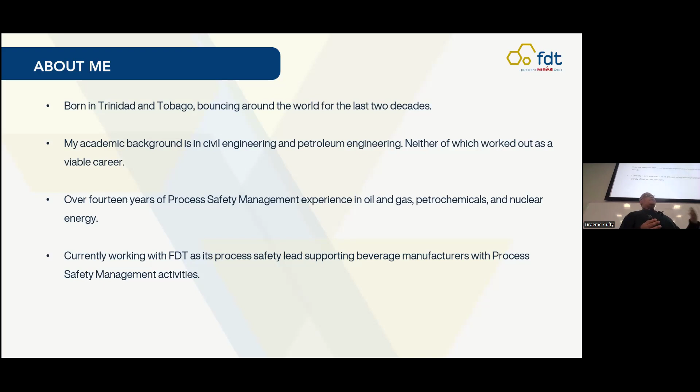This is going to be a silky smooth kind of presentation. So we're going to look at the origins of inherently safer design, where it fits in risk management, what the principles are. We're going to look at some real world experiences where maybe inherently safer design could have made a difference in the design of process systems. And we're going to look at some methods for actually incorporating inherently safer design into a project.

I realize it's a lot of young people here, but if you've worked in the industry for a while, have you heard of inherently safer design? Just raise your hand. Okay. Have you applied inherently safer design to a design project? Okay. And put up your hands if you've applied it consistently through all phases of a project and documented it in detail to allow an auditable trail. Okay, there you go. That looks about right, yeah.

Okay, so just to start off, an event that didn't go so well and maybe inherently safer design could have made a difference. So October 31st, 2014, a reusable suborbital rocket for a space tourism company owned by a billionaire, which you may know about, was undergoing a flight test. So the design of this vehicle used two twin booms, which they call feather flap assemblies, and those stayed at a 0-degree angle in normal flight. During re-entry, the feather flap assemblies would be rotated to 60 degrees to stabilize the vehicle and to slow it down as it re-entered the atmosphere.

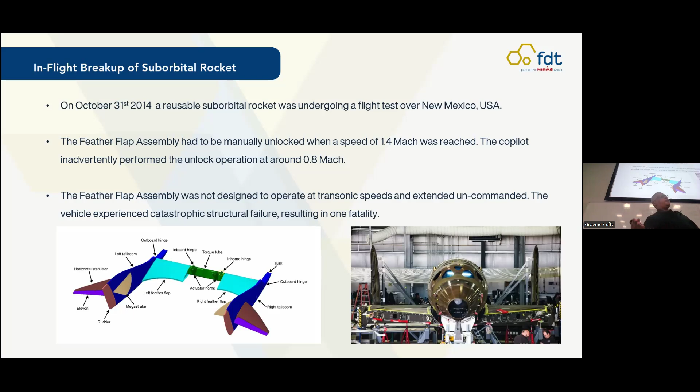So unlocking the feather flap assembly is a fairly straightforward process. It's basically just pulling a lever from lock to unlock, but it's an extremely difficult environment to do it in. So for one thing, there's time pressure. The co-pilot has 3 seconds to unlock the feather flap assembly. After 3 seconds, the computer will start screaming at you. And at 1.6 Mach, the flight would have to be aborted if they have not been unlocked. And at that point, you have a bunch of people who have paid $500,000 mad at you because they have not made it into space.

It's a very difficult operational environment. You had vibration and G loads. So the video from the cockpit recording showed the co-pilot had to lean off of his chair in order to reach the lock. His head was bouncing around. He was having a lot of problems getting a good hold on the lock. Also, the co-pilot was not used to the conditions. So he had qualified fully on a simulator, but this was his first actual flight in the spacecraft.

The unlocking steps are listed on a kneeboard, but pilots had said that there's so much workload in that environment that there's no time to actually look at those steps, and you're doing it all from memory. And the company assumed that pilots would get it right all the time because they had been trained. I'm not a rocket surgeon, so I'm not going to speculate on what the correct answer is. But based on the difficult working conditions and the fact that you could kill somebody if you get it wrong, that was an ideal time to think about how could we possibly do this differently. And maybe inherently safer design could have made a difference there.

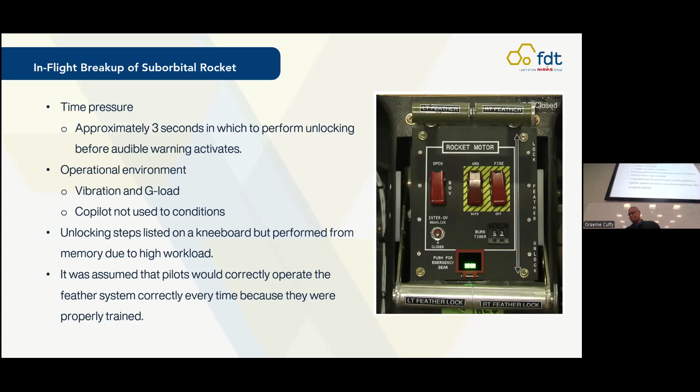Okay, ISD's origin. So there was a guy named Trevor Kletz, and he is the OG of ISD. So in the 70s, there were a whole bunch of fairly bad industrial disasters. And in 1978, Trevor Kletz thought that something had to change, and he actually formalized the idea of inherently safer design.

His thing was that if you don't have something, it can't leak. And that has the added benefit of making your plant simpler, cheaper to operate, easier to maintain.

The thing is, since humans started actually doing stuff, we've been applying principles of inherently safer design, even if you don't know it. We're all here because our ancestors applied inherently safer design on some level in order to survive. So, for instance, say you're in the desert southwest of the United States 800 years ago, and you're part of the Anasazi tribe, also known as ancestral Puebloans.

You got other tribes that are raiding you all the time, taking your stuff, killing your people, and you got a number of options for handling that. You got to do something about it. So maybe you can raise an army, but then you have to train these people, you have to develop weapons, all of that takes resources.

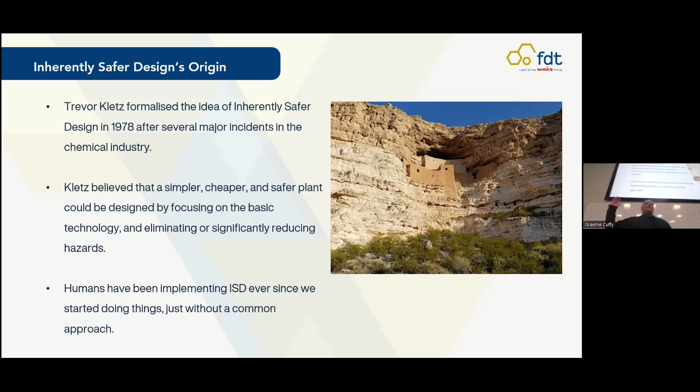So why do that when you can just take all your stuff and just move it up a cliff where one, people can't reach it, and two, it's hidden from on top, so it's more difficult to find.

So ISD fits within a range of risk management strategies. We've got inherent, which means we eliminate or minimize a hazard. We've got passive, where we use an engineered safeguard, but it's a safeguard that doesn't require any input of energy.

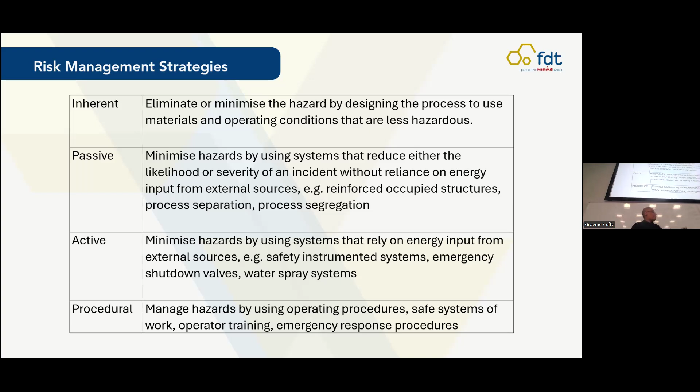We've got active, where we have another safeguard, but it requires energy going into it, like electricity or pneumatic air. And we've got procedural, which is where you manage your hazards by practices rather than engineering.

Thing about inherent and passive is that sometimes the line between them can get kind of blurry. So for instance, suppose you rate a pressure vessel, your operating pressure is 10 bar and you rate it for 50 bar. That's a passive protection measure, but it's also inherently safer design. That distinction doesn't really matter as long as it's there.

So you'll notice in the name it says inherently safer and not inherent safety. And that's because ISD is only safer relative to something else. So nothing can be inherently safe because your process will always have hazards in it. It's impossible to engineer out hazards. So an inherently safer design option is only safer with respect to some other kind of hazard.

An example of that was chlorofluorocarbons. You know, those bad stuff, those poking holes in the ozone layer. Back in the early 1900s, CFCs were actually the inherently safer option. When you're dealing with refrigerants like ammonia, which is flammable and toxic, or sulfur dioxide, which is toxic, or light hydrocarbons, CFCs look a whole lot safer.

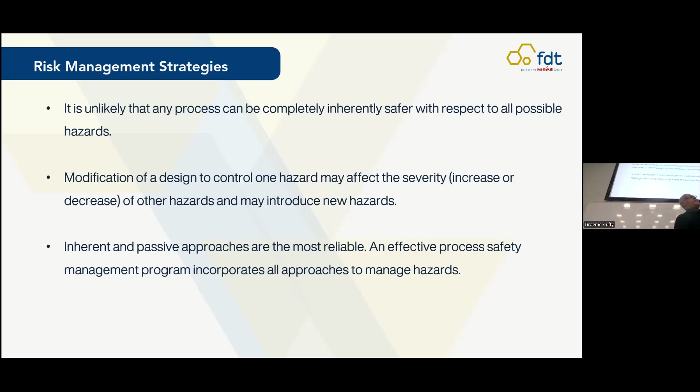With ISD, you have to be aware that modification of one control can remove a hazard or control a hazard, but it can also introduce other hazards, which you may not expect. Within that range of risk management strategies, your inherent and your passive strategies are really what you want to be going for because they're least likely to fail.

Benefits of inherently safer design. Fewer inherent hazards. Your hazards have been identified, assessed, understood, and controlled. You've identified your opportunities to control your hazards, and your likelihood has been reduced.

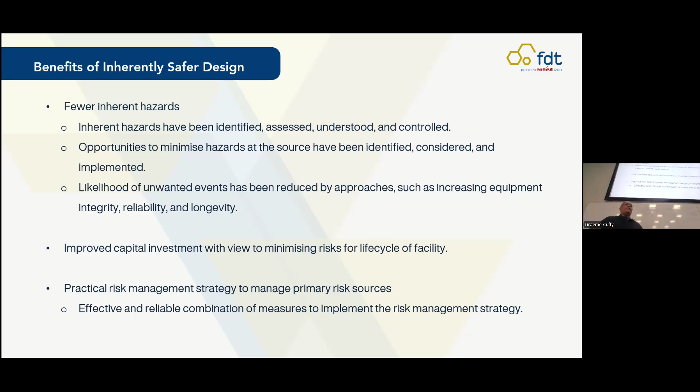Improved capital investment. The less stuff you have in a plant, the cheaper it is to buy the plant, cheaper it is to operate the plant, cheaper it is to maintain the plant. It also allows you to have a practical risk management strategy because the less things you have to go wrong, the simpler your protections, the less complex your risk management strategy is, and it's overall easier to deal with.

So ISD is based around 4 principles. Minimize, which is just, you got to use your hazardous substance because that's what you need for your process, but you just use less of it.

Substitution, which is where you take a hazardous substance and you replace it with a substance that is less hazardous. Moderate, which is where you use less hazardous conditions, or you use a hazardous material just in a less hazardous form.

Also, you reduce the severity of your operating conditions, so you operate at less temperature, less pressure, less voltage, current, etc. Simplify your process, make it easier for somebody to operate. If it's easier to operate, fewer mistakes can happen.

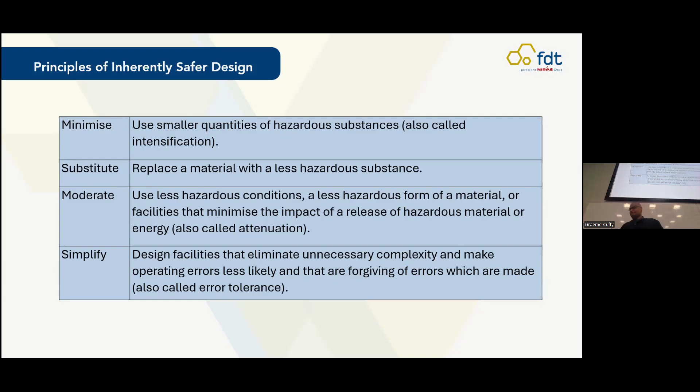Minimization is just, you have a hazardous substance and you decide to use less of it. So if I have a manufacturing plant, I want to reduce the inventory of any hazardous substance on my site. That's not just raw materials or final product. You also want to reduce your intermediate storage, so pressure vessels, reactors.

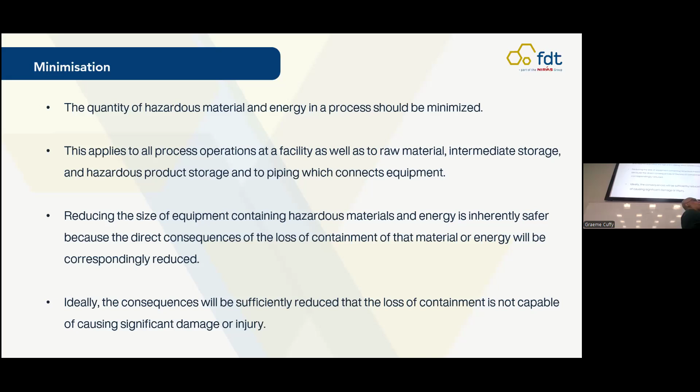Can anyone tell me another area where you can minimize the volume of hazardous materials you have on site, besides tanks and vessels? Piping, right? Use smaller piping if you can, because a significant volume of stored inventory on site is going to be in your pipework.

As an example, this was a bourbon distillery in Kentucky. On November 7th, 1996, lightning struck one cask warehouse. That warehouse went up. High winds carried the fire to other cask warehouses. There were 20,000 barrels of bourbon in each warehouse. So these warehouses were destroyed, and a whole lot of bourbon ended up in a nearby waterway, causing environmental pollution.

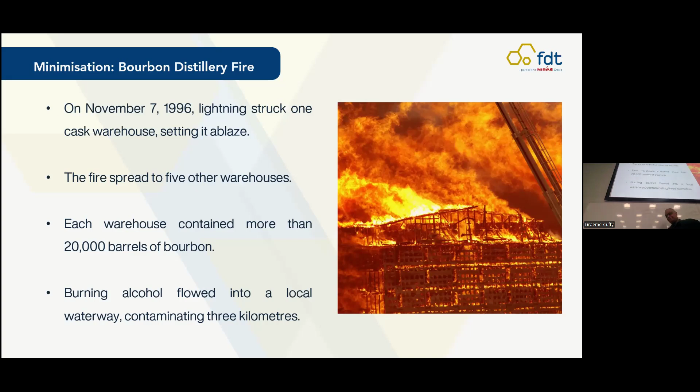So in terms of ISD considerations, you want to look at things like, can the inventory of each warehouse be reduced? Do you really need to be storing 20,000 barrels in each warehouse? Can the warehouses be constructed of fire-resistant materials, because this was all wood? Also, can you achieve better separation or segregation between warehouses so that if one goes up, it's not spreading to a whole bunch of others?

Trevor Kletz had another expression. He said that companies have no memory. What he meant by that was that something goes wrong, the company recovers from it, and then somewhere down the road, it goes wrong again, and they haven't learned anything. So in this example, the distillery rebuilt their warehouses exactly the same. Two years later, there was another bourbon distillery nearby that exactly the same event happened to. Lightning struck a warehouse, a bunch of warehouses went up, a whole lot of bourbon flowed into a nearby waterway.

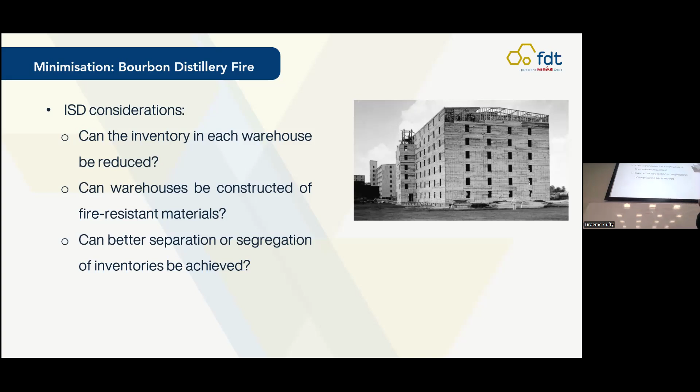Substitution just means that you're taking a hazardous material and you want to replace it with something less hazardous. As an example, you want to use water-based paints instead of solvent-based paints, which could be fumey, flammable, etc. If you're using solvents, you might want to use one with a much higher flash point than the one you're using, so it's less likely to ignite.

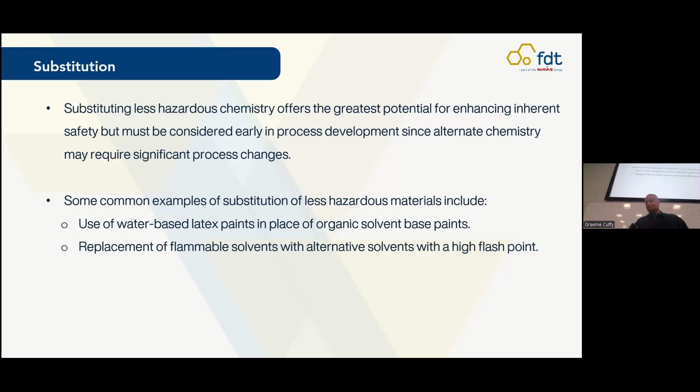This was an example of a large brewery that FDT was working on, and it's an example where you can consider inherently safer design but realistically just may not be able to implement it. This new brewery was going to use ammonia as its refrigerant, so it had a big ammonia plant with a lot of ammonia on site. I get why they went with it, that's what they're used to using. Ammonia is also an extremely well-known refrigerant and it works very well, so people are more likely to use it. But some of the problems with ammonia: it's an asphyxiant, it's flammable, potentially explosive, it's toxic, can burn your eyes, burn your skin, damage your eyes, very toxic to aquatic life.

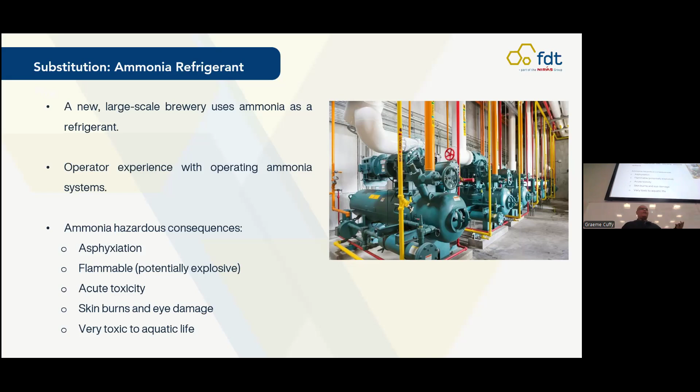One of the things is, in this design process, at no point was it ever asked, can we use anything other than ammonia? And even if we have to use ammonia, maybe we can use less of it.

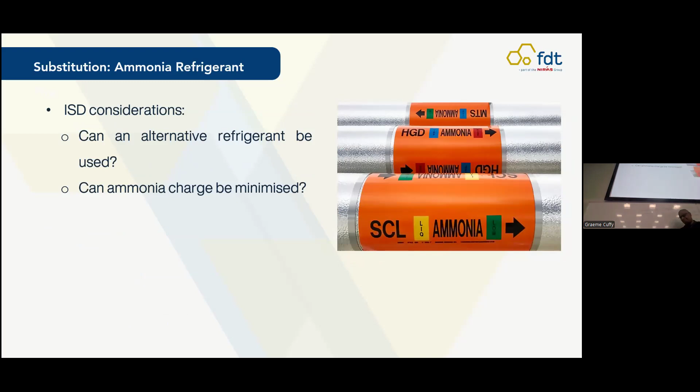Moderation is just using a less hazardous version of a material, also using less severe operating conditions. In terms of moderating hazards with materials, maybe you can use a more dilute version of a hazardous material. If you're dealing with liquefied gases, maybe you can refrigerate them so they're less likely to turn into vapor. Change of physical characteristics, example, particle size. Maybe you don't want to use finer particles, which lead you down the road of dust explosions.

In terms of moderating a process, you can do stuff like building stronger primary containment, choosing where to site your plant, also where to site your hazardous processes in relation to occupied structures. Materials separation and segregation, so spacing things apart or dividing things with physical barriers.

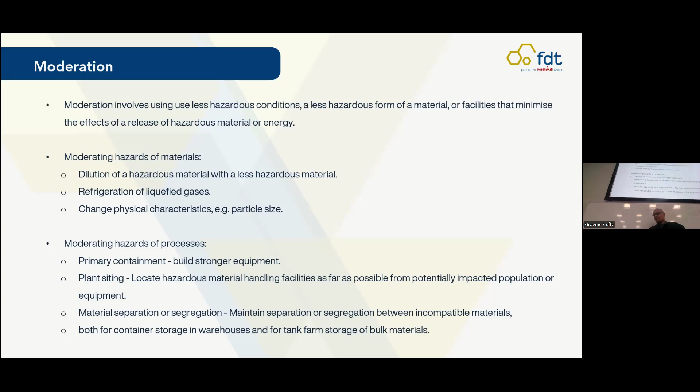Same large brewery that FDT was working on. They had a 92-degree high-pressure hot water system, and the hot water supply was at 8.5 bar. It came up in the HAZOP, wait, why are we supplying this at 8.5 bar? Surely we don't need that pressure. So one of the recommendations from that HAZOP was to go away and look to see if you can reduce that pressure. If you reduce it, then if you do have a release, it's less likely to be severe. You don't have somebody being hit in the face with high pressure hot water.

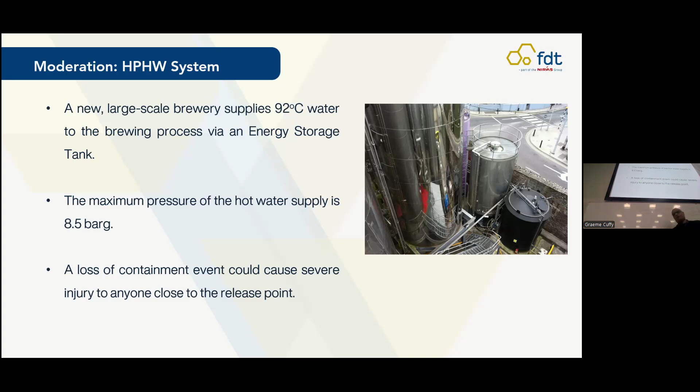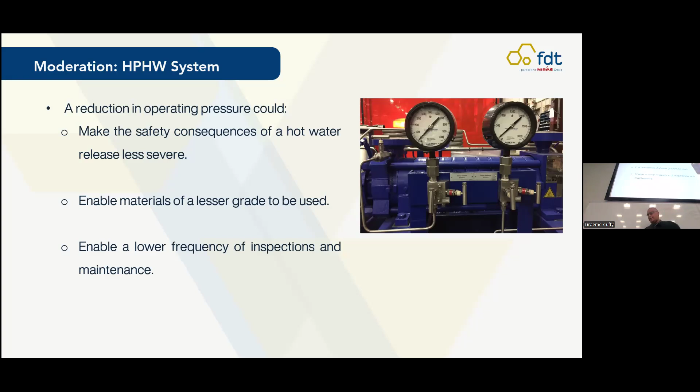Other advantages of using less pressure: you can use materials of a lesser grade, and it would also lower the frequency of inspections because now you're not as concerned if your system experiences a loss of containment.

Simplification is pretty straightforward. It's just making your process more user-friendly so that it's easier to operate, easier to maintain. People are less likely to make errors where bad things can happen.

Examples of simplification: using stronger, higher pressure rated equipment, eliminating unnecessary or seldom used piping and valves so you don't have dead legs where you can have corrosion. You don't have valves which you're not maintaining and can leak. Using stuff like gravity flow instead of pump flow so you don't have pumps to deal with.

Effective human factor design just means it's easier for somebody to interact with that process. Valves are easy to operate. They're not high up, they're not low down. They have all the information that they need to understand what's going on in the process.

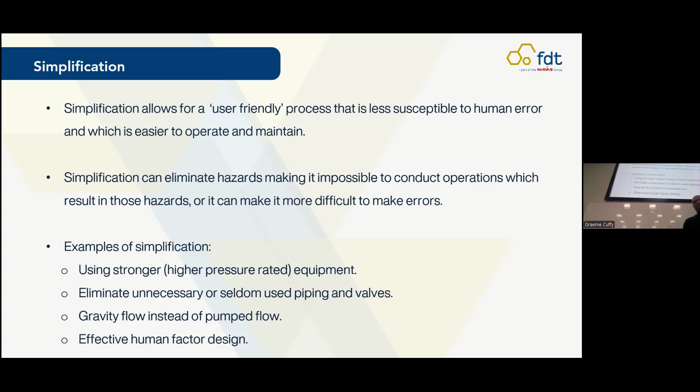This is another example from one of FDT's projects for a tequila distillery in Mexico. At this distillery, they use a CIP system for cleaning in place for the equipment, and the acid supply comes from an IBC. They have hydrochloric acid, and they move an IBC from their storage to where it needs to go. The operator has to open the IBC, put in a lance, and there's concerns with forklift movements, people getting struck by the forklift, or the forklift dropping the IBC, or hitting the IBC, or when the operator pulls out the lance, getting hydrochloric acid on them.

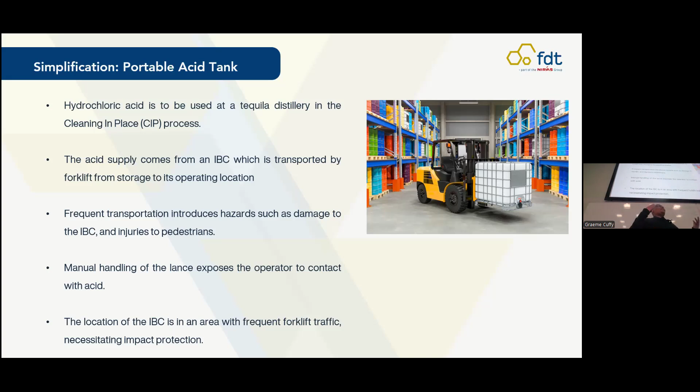I asked the question, well, why are you even doing it like this? Why aren't you using a fixed tank where you're filling it from the exterior of the plant and you don't have this lance, you don't have forklift movements, etc.? And the answer is that's a valid point, but it's too late to change it now. So ISD can help as long as it's easy, as long as it's early enough in the process that you can actually use it to make valid changes.

Application of ISD. Actually applying ISD in a lot of ways isn't very difficult. It's really a change in thinking, a change in design philosophy, but actually getting it right and doing it to the level where it's useful is actually a huge pain.

If you look in industry and ask somebody, well, let me see your company's inherently safer design procedure, you will not get one. Nowhere, well, I wouldn't say nowhere, but in my experience, nobody has one. Would anyone like to take a guess as to why no company has developed inherently safe design procedures? Because nobody wants it. Nobody wants another procedure to follow, right?

So your first step of applying inherently safer design, like anything else, is to have a good plan. A lot of people don't do this. It's just, let's see, somebody comes up with an idea. Oh, well, maybe we can do this better with ISD. But that's not the way it works. You actually need to dedicate some time into planning out how you're actually going to do it.

Stuff that needs to go into your ISD plan: you need to identify where in your process can most benefit from ISD. You identify the processes, the materials, the kind of hazards that you think you might encounter over the full life cycle of the plant, not just the design, but actually through the operations and maintenance. You want to focus on identifying design options that have the lowest inherent risks. You want to set goals and criteria by which ISD achievements can be assessed. You want to identify a schedule of activities, the resources that you need, what the deliverables are going to be for how you're going to identify and manage your hazards, as well as get input from the people who will actually be using the process as part of your ISD plan, because they know what is likely to go wrong.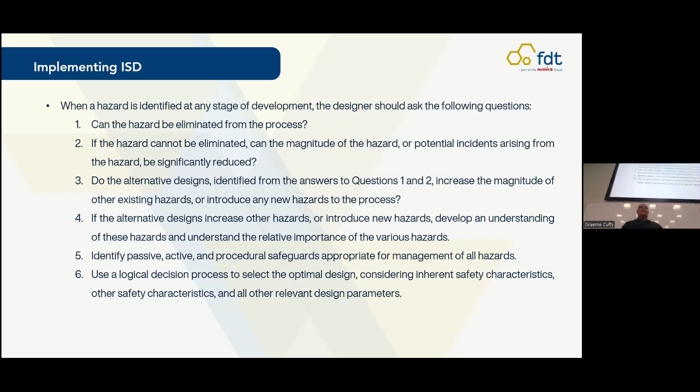ISD approaches. So this is where it gets really interesting. You can implement ISD formally in 3 different ways: checklist process hazard analysis, independent process hazard analysis, and integral to process hazard analysis.

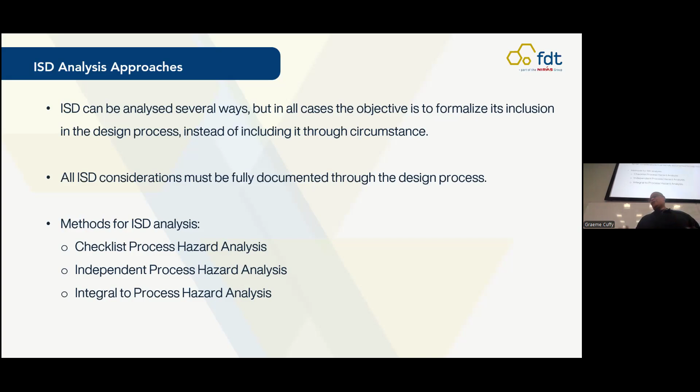So when you're implementing ISD, you're looking for orders of protection. In decreasing priority, ideally you want a first order ISD. If you can't get a first order ISD, you want a second order ISD. If you can't get a second order, then you go to layers of protection.

As an example, say you're a fiend for barbecuing. Day and night you're barbecuing, but your concern is a gas fire. So you decide, you know what, I'm going to do away with my LPG grill and buy an electric grill instead. That removes the gas fire hazard.

But maybe your thing is, okay, I really like using LPG to barbecue, and I do it so often that I have 30 cylinders of LPG in my garage. Maybe that's not a good idea, so I'll make the sacrifice and drop it down to 5. That's a second order ISD.

But then you think to yourself, I really need those 30 cylinders of LPG. So what I'm actually going to do is buy the plot of land across the street and build a reinforced concrete munitions bunker with CCTV and fire protection. I'll keep all my LPG cylinders in there. That's your layer of protection.

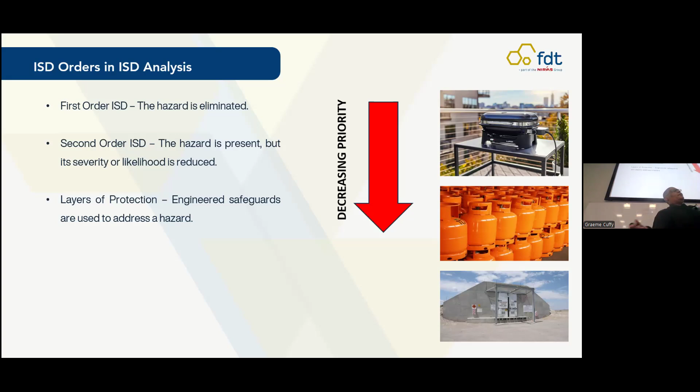Checklist PHA is probably the simplest way to incorporate ISD. What you're doing here is you make a checklist beforehand where you write down where you think you're going to get hazards in your system and what those hazards are likely to be. Then you get everybody in a room and go down that checklist, evaluating each hazard, and come out with a recommendation on how you can improve things.

The advantage of that is it's really simple. The disadvantage is that you've already limited yourself by using a checklist. People come into the analysis, see a checklist, and think that is the scope of the analysis, but people need to think beyond what's documented in the checklist.

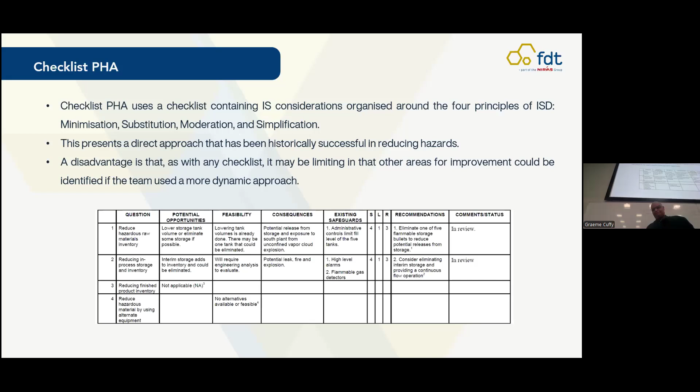Independent PHA is like any other PHA you may encounter, but you're only looking at opportunities for inherently safer design. In a normal HAZOP, for instance, your recommendations would probably be around engineered safeguards, but in the independent PHA, you only recommend things that apply to inherently safer design.

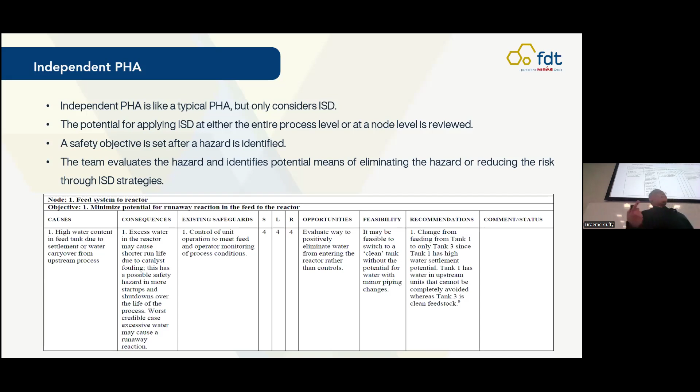Disadvantage of this method is that it's more heavily PHA based, and you may not have a team experienced in PHA, so they're going to have to learn how to do this properly. Also, it's one more PHA that you're going to have to do in your design, and that's probably not going to sit well with your project manager.

Integral to PHA is where you take a regular PHA like a HAZOP, and you do it like a regular HAZOP, but incorporate ISD opportunities into it. The disadvantage is that it's going to make your hazard study longer, and that's not going to be popular in your design project.

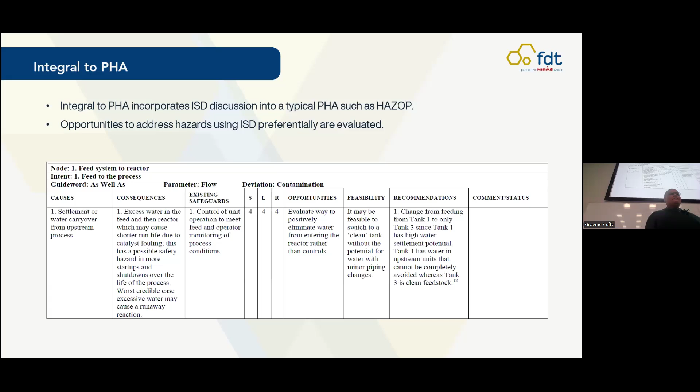So to summarize, ISD is a philosophy which focuses on elimination of hazards or reducing the magnitude of hazards. You're not going to be able to make a process 100% safe with respect to all possible hazards. Inherent and passive approaches are the most reliable, but your risk management plan is going to have to incorporate all of the different types of risk management strategies into it.

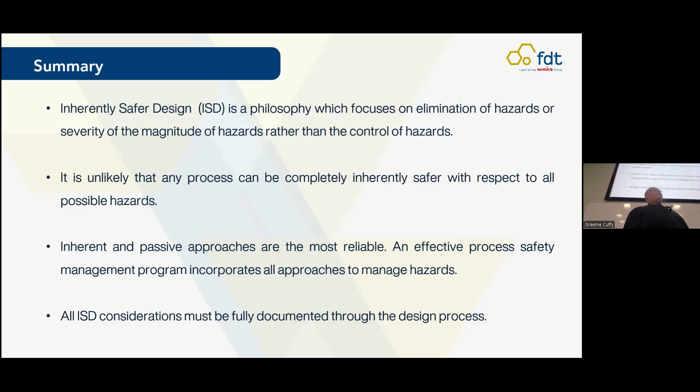Very importantly, if you're making the decision to actually use ISD, you're going to have to document it. That's not going to be a small amount of documentation, it's going to be a lot. It's not going to be popular, but if you're committing to do it, you commit to do it right.

To close off, using an example of where ISD was done right: if you're familiar with the Apollo capsule, back in the 1960s, when they were looking at how to decelerate the capsule splashdown, one option floated was a pop-out rotor blade system, which would have been awesome as hell. But realistically, doing that with 1960s technology probably wasn't going to work. So they went with a system that used 3 main parachutes, and that worked well enough that it's pretty much standard for Western design capsules up to this point.

Last year in the news, there was one particular company's space capsule that left their astronauts stranded on the International Space Station for 8 months. Back in 2019, that capsule was going through a launch abort test, where you put the capsule on a pad, fire the launch abort motors, blast it up several thousand feet into the sky, and the parachutes deploy to bring it down to Earth. In that test, one of the parachutes actually failed, but because it had been designed with redundancy, where it could safely land on 2 parachutes, it was actually a successful completion of the test.